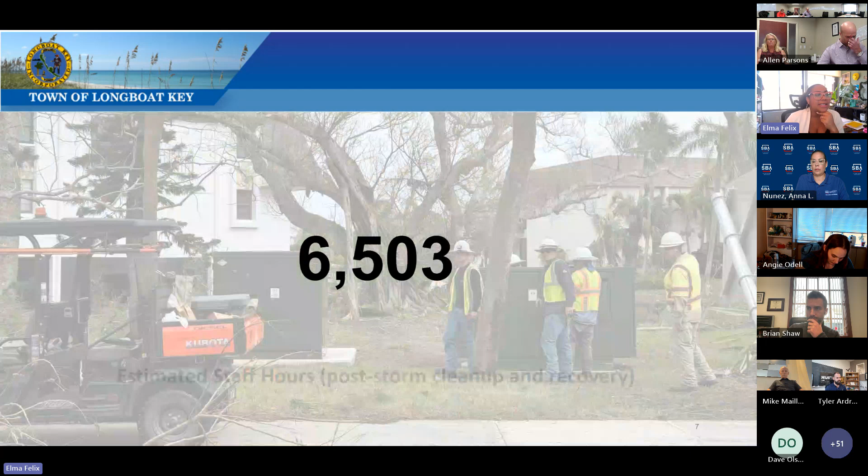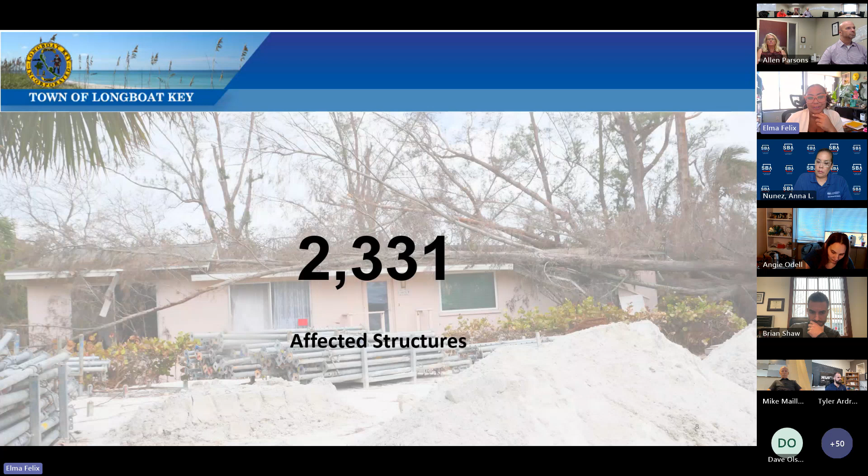6,503, that's the estimated staff hours for post-storm cleanup and recovery. 2,331 affected structures on the town. And if you like percentages, that's roughly between 25 to 26% of all the structures on the town of Longboat Key. And 849, that's the number of permits that have been issued between November 1st and today.

That's a lot. And so the storm we know has affected everyone. It has been such an emotional roller coaster. It's been incredibly overwhelming. And so now that the dust is settling just a little bit, we wanted to take pause and share some valuable information from our subject matter experts, not just at the town, but connected to both private sector and state resources to share kind of where we are, what we've learned, and to help answer some of the questions that our community might have.

So with us today, we have an amazing roster of subject matter experts from the U.S. Small Business Administration, MIC Insurance, town staff from Planning, Zoning, and Building, floodproofing.com, and the Division of Emergency Management. So with that, the very first presentation up is by our own Town of Longboat Key Planning, Zoning, and Building Department with Patty and Neil. Patty, I have the presentation loaded up and ready when you are.

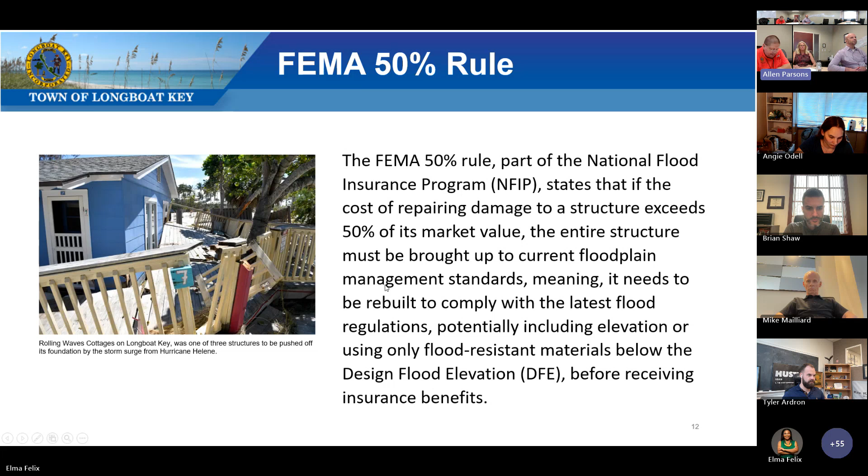Non-FEMA compliant homes are the ones that are mostly targeted. The rule aims to build long-term resilience, improve community safety over time, lower flood insurance costs, and ultimately preserve property values.

Substantial damage is the cost to repair a building or structure. Substantial damage is when the cost to repair a building or structure exceeds 50% or more of its pre-damaged market value. The building is then considered substantially damaged. If it is substantially damaged, the owner will be required to bring the property into compliance with the floodplain management regulations, the Florida Building Code, and comply with the National Flood Insurance Program requirements.

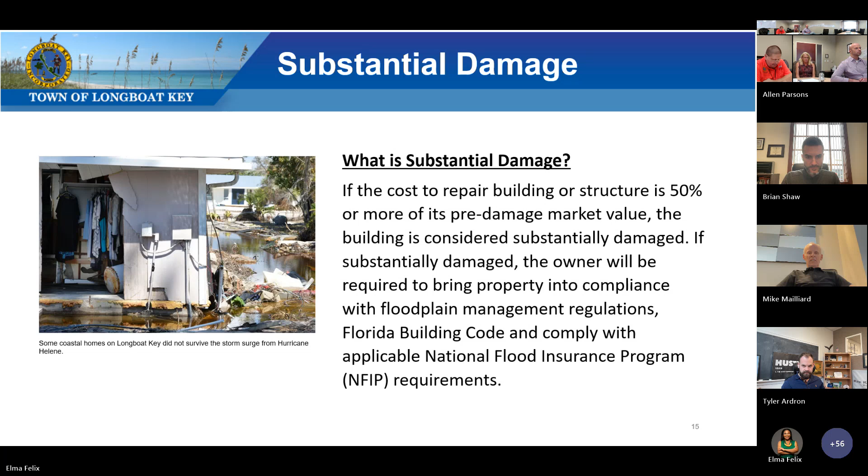Substantial improvement means any combination of reconstruction, addition, repair, rehabilitation, alteration, or other improvements of a building or structure where the cumulative cost equals or exceeds 50% of the market value of the building before the improvement or repair is started.

The term does not include, and the costs involved do not include, any code-required elements that are required to correct existing health, safety, or sanitary code violations previously identified by the building official and that are the minimum necessary to assure safe living conditions and habitability.

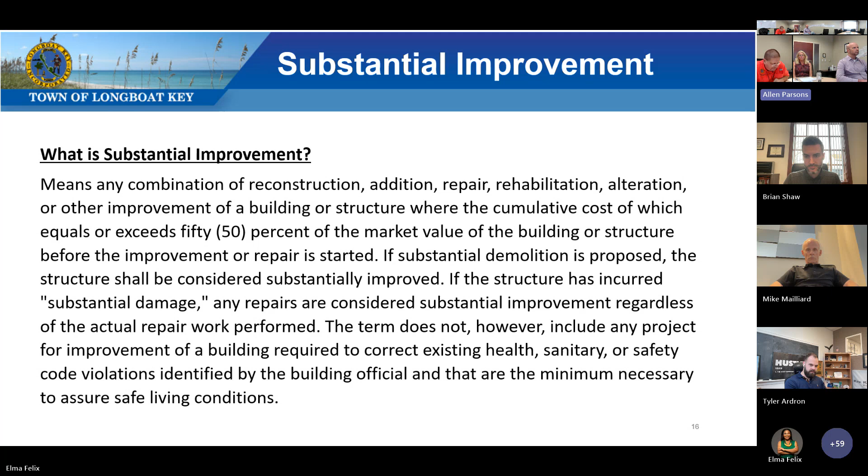If a building is substantially damaged or substantially improved, it must be brought into compliance with the flood damage prevention regulations in the NFIP as well as the local floodplain ordinance, including elevating the buildings to the design flood elevation, which is typically the base flood elevation plus 1 foot.

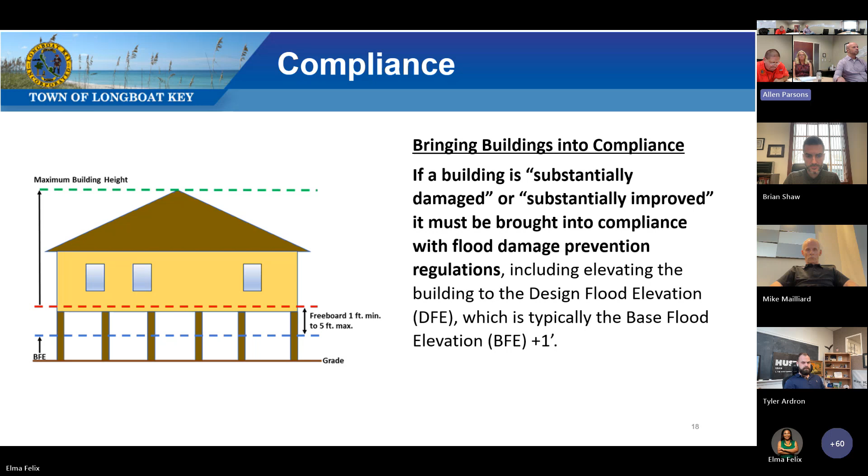Given the impacts of sea level rise, the town of Longboat Key has revised their building height regulations, now allowing property owners and their design professionals to optionally elect 3 feet of freeboard townwide, and up to 5 feet of freeboard in areas that are at or below 3.5 feet of elevation on their lot.

Likewise, all electrical, mechanical, and plumbing equipment, bathrooms, laundry rooms, etc., must be elevated as well to that design flood elevation that the owner or builder elects to build to. Non-residential buildings, such as commercial buildings, may be dry flood-proofed instead of being elevated, and building permits are required for elevating the structures.

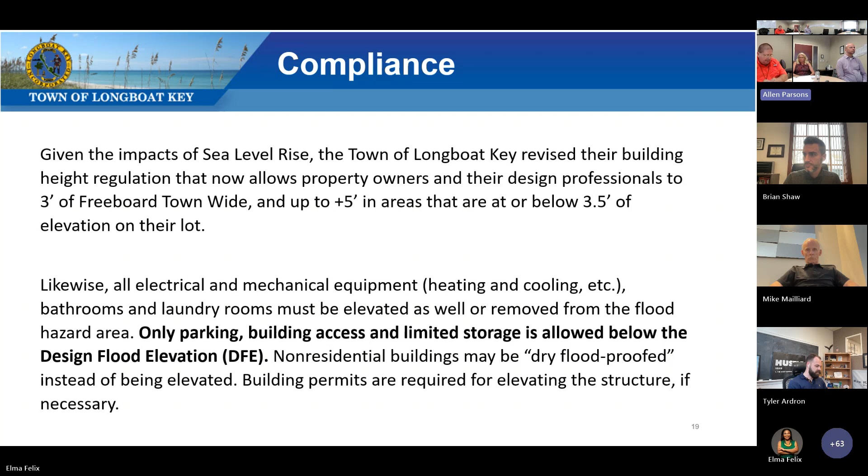After the storm, or storms in this case, we canvassed the areas originally with windshield inspections, which are just the initial assessment, what we call windshield inspections, of what we suspect to be substantially damaged or substantially affected structures.

We posted 3 different placards when we found structures that may have had some damage that we could see from the outside of the structure, particularly such as water lines we can see from the water raising up the side of the building, damage to air conditioning units, electrical panels, things of that sort.

A yellow placard would mean that we found stuff to believe it's been affected, and you may or may not have to get some additional work done. You'll definitely need a permit for the most part, and you can come in and get that from the building department. The red unsafe

placard means you should not occupy. It's been found that there are either structural deficiencies in parts of, or the majority of, the building itself, rendering it unsafe to occupy. You can enter at your own risk if you had to get some belongings out or whatever, but we would mark on the placard what specific areas of the structure would be particularly unsafe to enter.

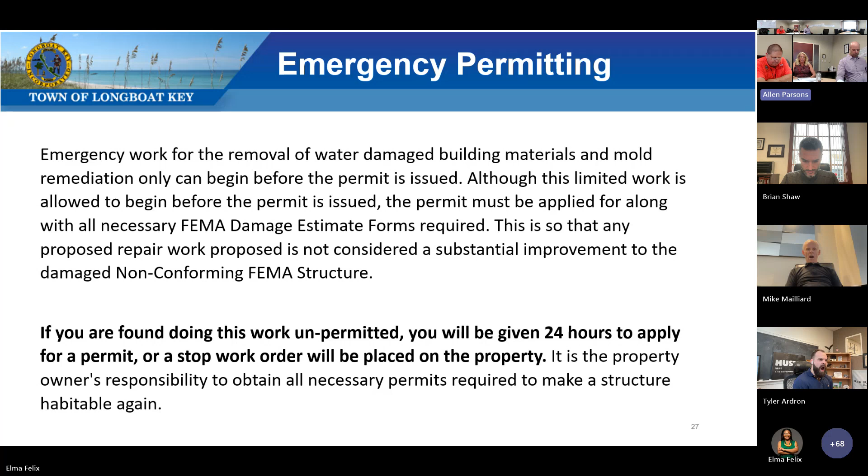I'd like to give you some information about emergency permitting to assist you in your work here on the island. Here at the building department, we have streamlined the initial permit process by allowing work to start before a permit is issued, such as removing drywall material. We are only requiring that you submit a permit application for this work within a 24-hour period. Later, when you discover that more work needs to be done, an updated work description and scope of work is needed. Depending on the extent of the additional work, a floor plan layout page may be needed and additional plans, as well as the Longboat Key FEMA forms.

We are experiencing a high volume of permit submittals, which has outpaced our existing staff. We have been looking proactively for additional staff since September and have reached out to other agencies, employment agencies, social media, and it has been quite challenging getting staffing, especially because they have to be Florida licensed. We realize how important it is getting your permits out to you and are working as diligently as possible. Staff are working additional hours to process more permits, as well as getting additional staff support to further assist in permit issuance, as well as continue streamlining our processes.

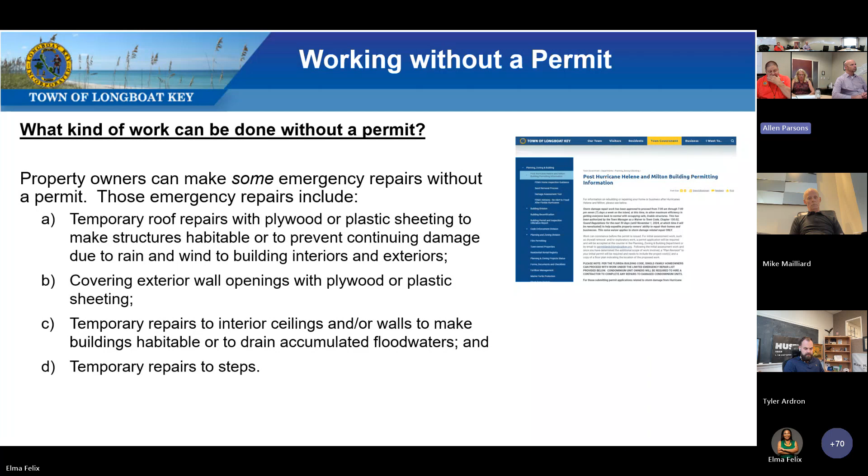If you need additional information, know that we are here for you and doing our best to get you what you need. As our staffing increases, our permitting processing will as well. Thank you for your patience as we all work together, and be Longboat Key strong and resilient. Thank you.

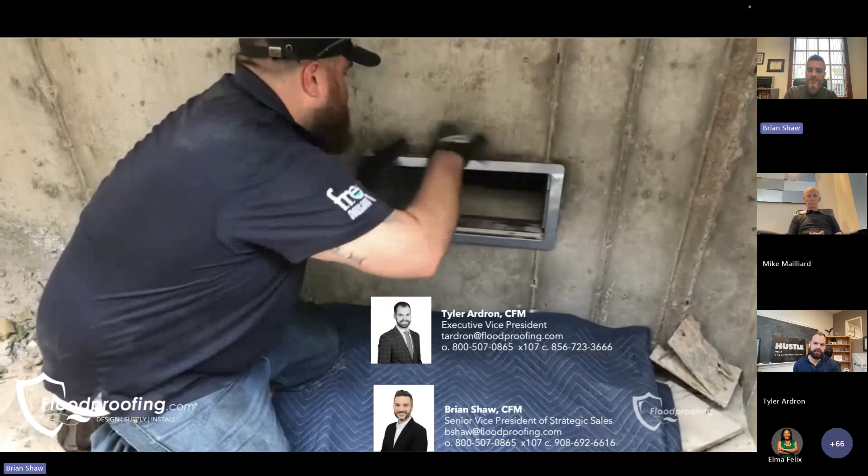Thank you so much. Today we want to go over what floodproofing options are available on the market for buildings. I'll be discussing that - I've been a certified floodplain manager with floodproofing.com for about 16 years now. Then after I go, Tyler will be talking about the flood insurance side of our business as well.

I just want to explain a couple of different sides of our business at floodproofing.com and what we really do on a daily basis - working with building owners, contractors, architects, and engineers to design and manufacture these floodproofing products for buildings, both residential and commercial. We've been in business for over 25 years. We not only manufacture and distribute these products, but we also install them and do deployment training, so it's a turnkey service. But really what separates us is our complimentary front-end engineering and design.

I encourage anybody today with a property to explore whether flood mitigation products are a fit for their particular building. You can do so by reaching out to me or Tyler directly, or by sending project details over to plans@floodproofing.com. On staff we have certified floodplain managers, engineers, and licensed insurance agents, and this is a complimentary service where we can do an analysis on your particular building.

We also have territory managers stationed around the country, so if we need to get on site, we can do that as well. We really want to do a full risk analysis and determine what possible flood mitigation solutions are a fit for your building, and we can provide budgetary estimates.

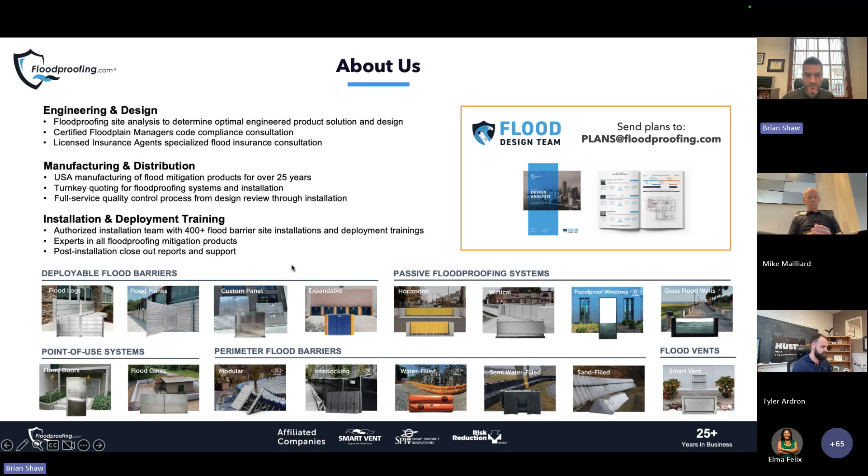Why all these products, we manufacture and distribute. I do want to hit on a couple of the products today, from a couple of our affiliated companies, like SmartVent.

This is where we do hydrostatic relief flood vents, considered wet floodproofing. These are for elevated buildings with non-finished enclosure space. This hydrostatic relief flood vent relieves pressure off the wall, letting the floodwater flow underneath the space and out the other side. We've been doing this for a long time. This side of the business is our wet floodproofing side.

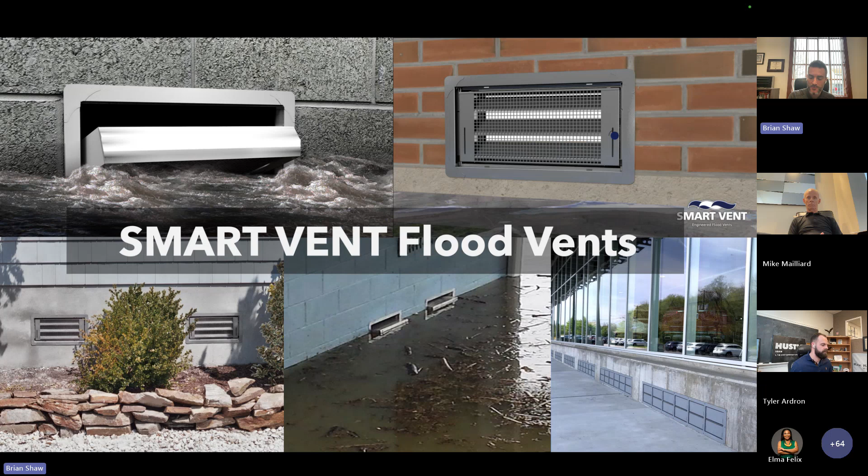A couple products I want to hit on today are on our dry floodproofing side. You see here a mix of everything we offer, but the first one is our expandable flood barrier. This is our most popular residential floodproofing product on the dry side by far, also a fit for certain commercial buildings. What makes this product unique is it's 28 inches in height, so it's for shallow flooding scenarios, but it's unique because it's expandable.

It expands from 30 to 43 inches, and it doesn't require any permanent anchoring to the building. It's an off-the-shelf style product. It pressure mounts to the door jamb, and then has an inflatable seal on the sides and bottom. You could deploy this in under 5 minutes - one person, anyone could deploy it. Very popular for entry doorways, for shallow flooding.

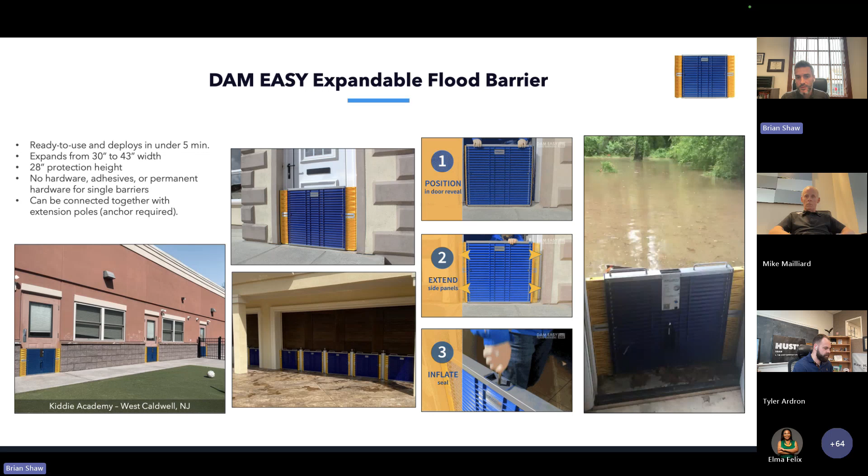With this product, you can daisy chain them together to create longer runs for an overhead door scenario or to do some type of perimeter run. That's done through, if you look at the picture in the middle, extension poles that require one anchor pre-installed in the ground. But even with that pre-installed anchor, by hand, you just screw in this post and then set up your barriers to create the flood wall. Very popular product here.

The next product, due to limited time, is our flood logs. The flood logs we manufacture, unlike anything else in the market, are 12 inches high each. May not mean anything to you just yet, but everything else in the market is 6 to 8 inches high. With these being mega flood logs, it cuts down deployment time by about half because you're deploying half the amount of product. These flood logs are highly engineered, custom aluminum extruded pieces with gaskets on them.

How you deploy this is very simple. You have pre-installed inset anchors, and side brackets that you bolt into place, drop these logs in, one on top of the other, and then you have a top-down compression element and some lateral compression bolts. So you're using this gasket compression technology to have this flood-proof flood log.

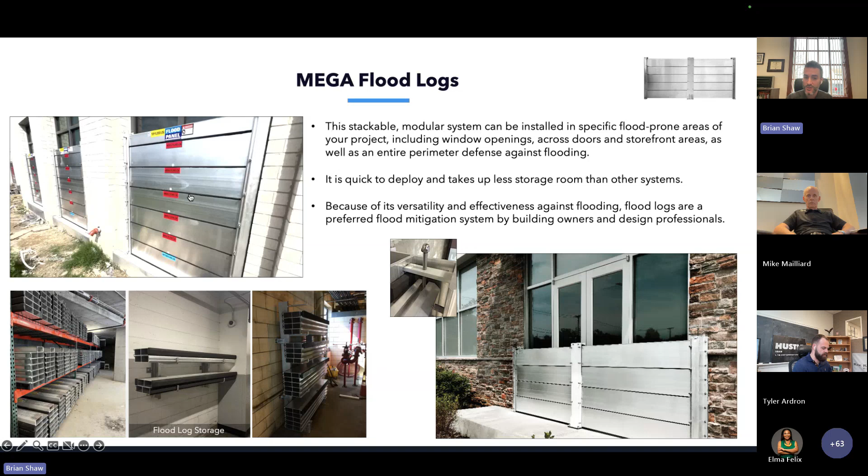And we say flood-proof - it's different than waterproofing - because it not only doesn't let the water through, but these flood barriers also have to take the impact. It has to take a tree that falls down during a flood event and hits the barrier, and still be strong enough to perform.

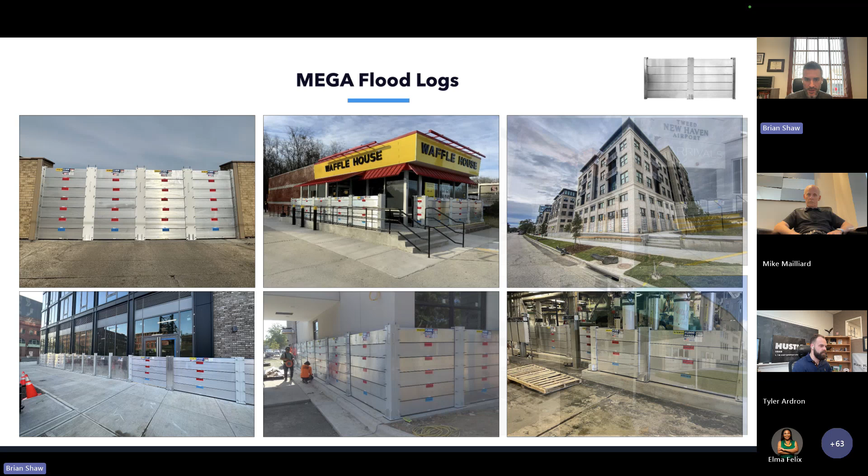Just a couple other visuals with this product - you could see here we've done a bunch of different scenarios, whether it's 90-degree corners, longer runs, higher heights. Again, these are fully customizable. And then a couple other shots here as well. So there are a lot of different options available.

Can't discuss them all today, but the main message we want to point out is please reach out if you have a property in a flood zone and you're interested in flood mitigation. We will give you our recommended options based on the site. We'll give you the costs - the cost of install, the storage requirements, the deployment times - because all these things have to be considered for that particular flood barrier, and how much horsepower you need to actually get it deployed before an event, and what type of storage room you have.

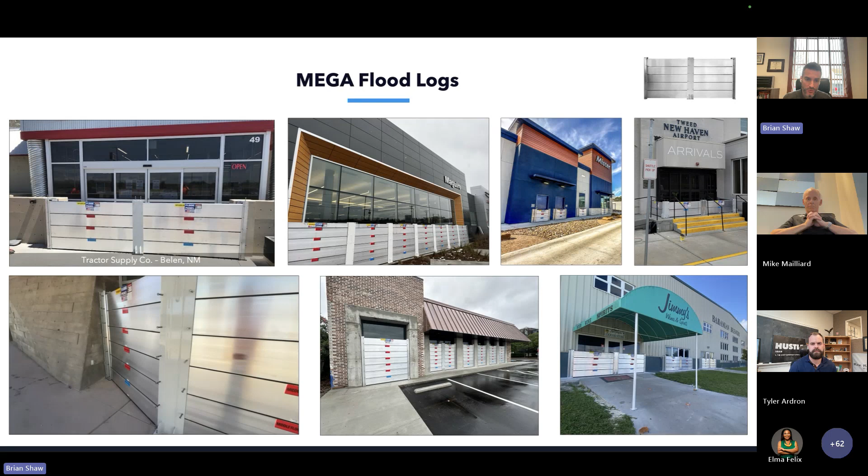And then before I pass it over to Tyler to talk on the insurance side, I did just want to give you a real, recent case study.

This was an oceanfront residence in Naples. We were contacted earlier this year. It was a 10,000 square foot oceanfront residence. They were interested in flood mitigation.

We got on site. One of the first things we do for existing buildings is assess those existing walls. If you want 5 feet of protection, we want to make sure those existing walls could withstand the hydrostatic loads for 5 feet of flood water. So it makes sense to protect the openings to that height. For this particular case, we did 4 flood doors, 8 flood log systems, and 4 3-sided seal flood panels.

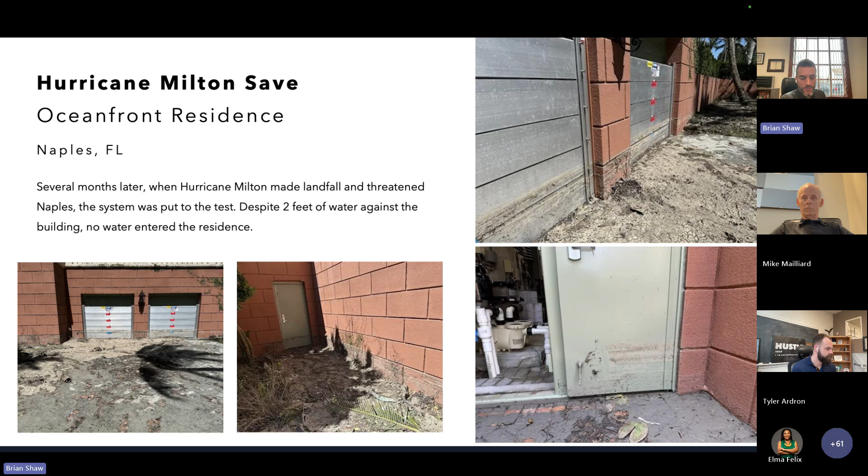A couple months after these were installed, Hurricane Milton hit, and we call this a save. They deployed their products before the event, and they got 2 feet of water up against the building. As you can see in these pictures, the water level line from the dirt and debris. Talked with the homeowner, and not a single drop of water got into the building. It was due to the flood protection measures that the property owner worked with us to get installed. So, great success story here from these flood mitigation products, saving the structure.

And with that said, I will pass it over to Tyler.

Thanks, Brian. My name is Tyler Ardron. I am the Executive Vice President of our family of companies here. As he said, we have engineers, certified floodplain managers, and licensed insurance brokers like myself on staff. I know we have an insurance person who's going to speak to the insurance end of things. I just wanted to touch on some higher level things, and we'll speed through it since we're short on time.

So the National Flood Insurance Program, the NFIP program, I just want to give a basis of what that is. The NFIP was formed in 1968. Before that, you were able to get flood insurance covered under normal insurance perils, but at that point the private companies no longer wanted to offer that insurance peril. So the government had to step in in the late 60s and form the NFIP program.

Their goal is to protect structures built in floodplains. It's the primary source of flood insurance for the country. Private flood insurance has come back in the last 10 years or so, and it's gotten larger and larger. But the NFIP is a guarantee — as long as the community is part of the NFIP program, anybody in that town is able to get NFIP flood insurance.

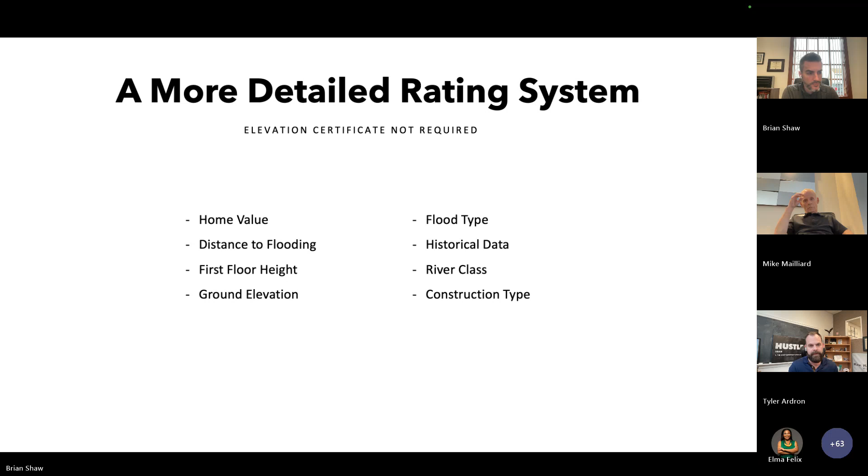Staying the same - everything pretty much stays the same. The only thing that's changing is how they rate properties. But what's staying the same is the CRS discounts are still around, the mandatory purchase requirements meaning if you have a federally backed loan you'll be required to have flood insurance if you're in an A or V special flood hazard area, the coverages I went over earlier, the EC can still help, and there are statutory rate caps still in place.

Number 2, correctly rating that person. There are times where even though the rates are regulated through the NFIP, I see that something was missed in the insurance quoting process by another agent, or the elevation certificate was done wrong or incorrectly, and simply fixing a paperwork issue could potentially save money on your flood insurance.

And number 3 is private flood insurance. That's new, or not new, but really the last 10 years. There are some negatives though with private flood insurance - real quick, just to rattle them off: number 1, you're not eligible for federal grants. You have to have an NFIP flood policy to be eligible for a federal grant, so that's a big thing to keep in mind.